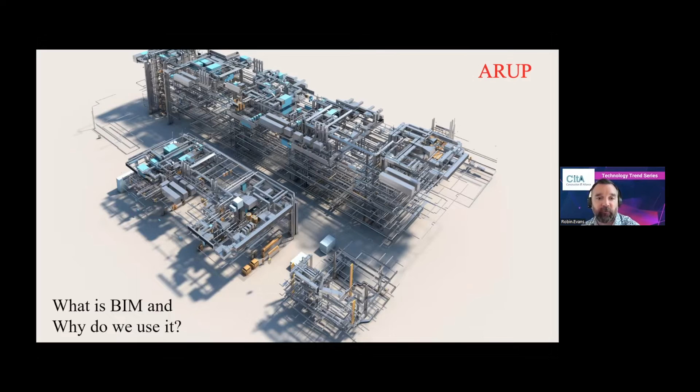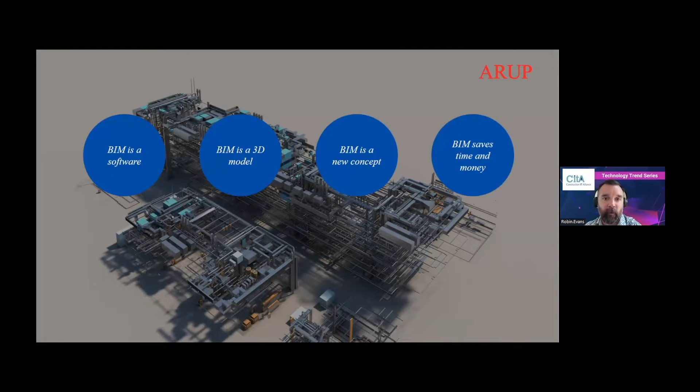So some common misconceptions. BIM is a software. BIM is a 3D model. BIM is a new concept. And BIM saves time and money. So the BIM facts. So BIM is actually a process. There's lots of people still talking about BIM and technicians exclusively, like in the CAD draftsman days.

Arup say that building information modeling is a descriptive term for technologically advanced, digital, collaborative, and information-centric processes in built environment design, construction, and operation. This means that all project stakeholders should be involved, which unfortunately is not always the case, and this can impact the overall potential benefits of BIM on the project.

So secondly, BIM is a 3D model. BIM uses 3D models as tools that form a part of the BIM process. These models can be used to store project information and display that information in a range of ways, including 2D drawings, schedules, 3D views, and so on.

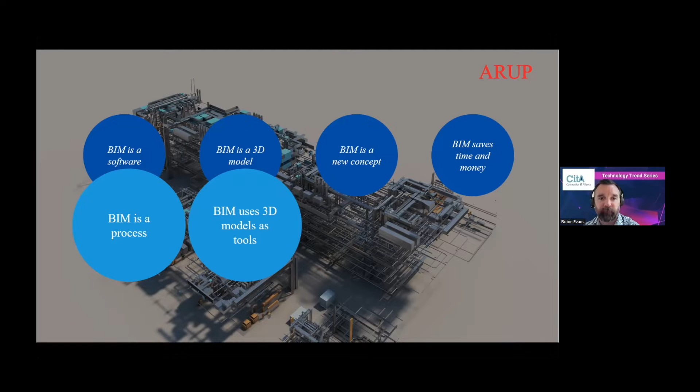BIM is a new concept. BIM has standardized existing, mature, and well-defined processes of project management. And the recently, 2018, published ISO 19650, as well as its predecessor, PAS 1192, has helped to progress this even further.

BIM saves time and money. I guess, just to be clear, BIM has the potential to achieve significant savings in terms of time and money, but this is only possible when the correct BIM process is followed and the BIM requirements are clearly defined and developed to suit the specific project and client needs. And conversely then, BIM also has the potential to add significant cost if this is not done.

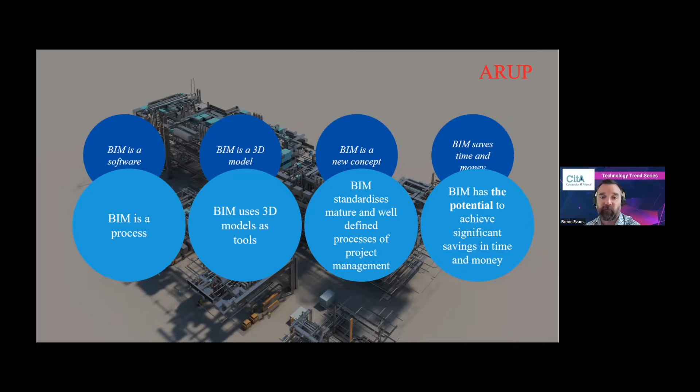So what are we meant to be getting out of BIM? Amongst a whole lot of other benefits, and in my case, mainly focused around MEP, some of the benefits we are meant to be getting are time savings, automation of design, better coordination, improved cost certainty, realistic visualizations, and really using the BIM model as the central database, which is of course what Revit actually is, for producing 2D and 3D drawings, schedules, equipment data sheets, visualizations, bills of quantities, and so on.

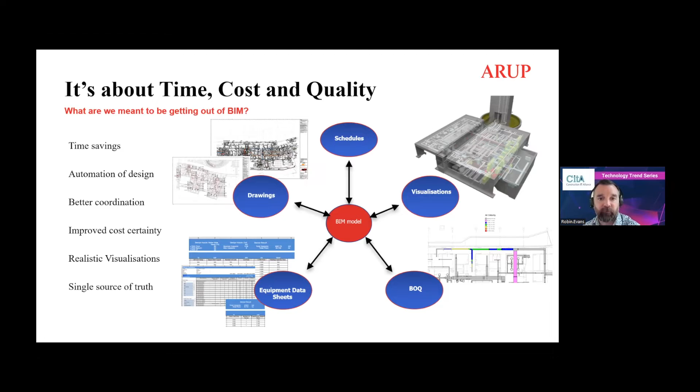But what are we actually often getting out of BIM is disconnected information coming from multiple sources, which may lead to inconsistency and risk of error. So although a lot of companies are embracing well-developed, efficient BIM workflows on many projects, there are still some projects which are not realizing the full benefits of BIM. And this can be caused by things like I'll go through on the next slide.

So I'll start with an issue that we see as quite a serious risk when delivering a BIM project. Basically, there's no such thing as one BIM. It can mean many different things for different people. And it's really important to agree at the outset of your project what it is supposed to mean in your case and on your project. We often hear people talking about level 2 BIM or BIM to ISO 19650 as if it defines the scope of the BIM model. It doesn't. It does do a great job of mapping out the process, but it doesn't set the requirements.

It can also be seen in what is sometimes referred to as academic or theoretical BIM versus practical BIM. And this is where we see an appointing party asking for all of the bells and whistles that BIM can possibly theoretically provide, like masses of parametric information or very high levels of graphical detail, without thinking enough about what they will actually use the model for or what the value of what they are asking for will give them. And also the issues that this could cause, like slow running models due to very large file sizes and so on.

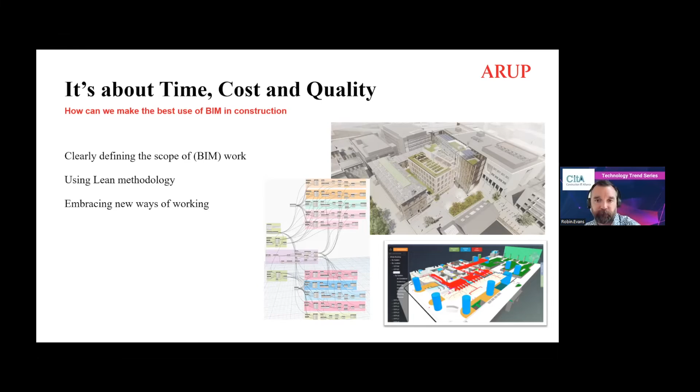So mapping our digital workflows is something that we've been developing in Arup over the past few years, and it's something which provides so much potential, especially when that same workflow is being followed globally. This has been successfully implemented, of course, in lots of industries to standardize processes, and it's a really great way to easily identify inefficiencies. ISO 19650 also has lots of small examples of workflow maps which help to describe a process in a visually easy to understand way.

Another really important consideration in making the best use of BIM is structured data. So using structured data on our projects is key for digital efficiencies. And this isn't just related to Dynamo scripts or Revit tools, but that's obviously really important. We're talking about digital information as a whole. For example, if we structure our Excel sheets in the same way using the same standardized template for all of our calculation sheets, we'll be able to harvest design information much easier in the future.

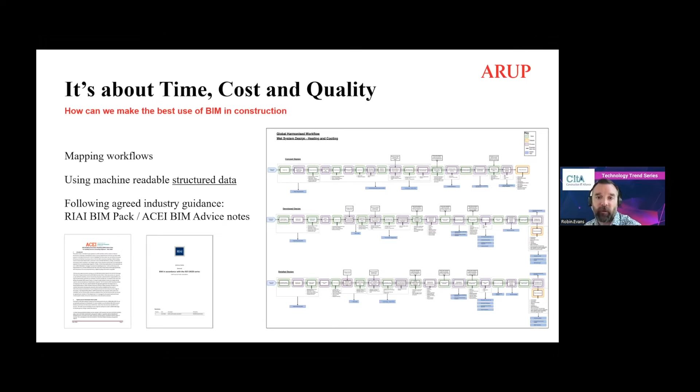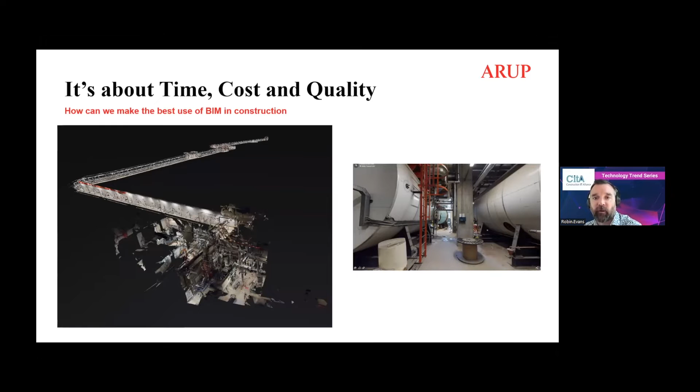And then we can produce really realistic photographic Matterport scans that we can view, something like this utility tunnel, and the little close-up there on the right, where we can see exactly where everything is and how things are constructed, even when we're off-site. So we can do virtual walkthroughs and so on, even when we're not there. And this is really useful, especially for hard to access areas. We've got a look at some really nice high level renders, which really help all of our stakeholders easily understand our designs.

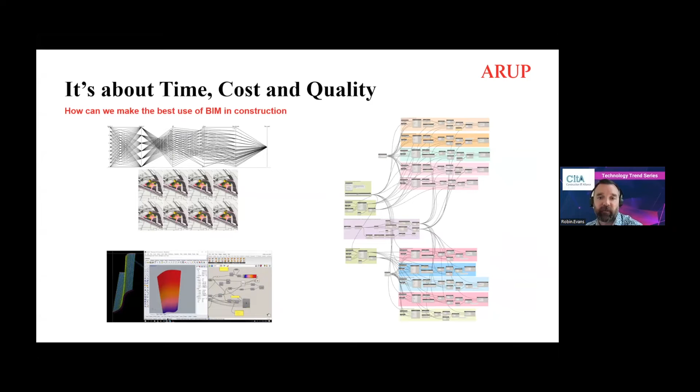And finally, then, if we do put all of our information into our models in a structured, machine readable way, we can leverage that for things like the parametric modeling examples on the left, which assess thousands of design options at the click of a button, or automating repetitive tasks by using Dynamo scripts like we see on the right.

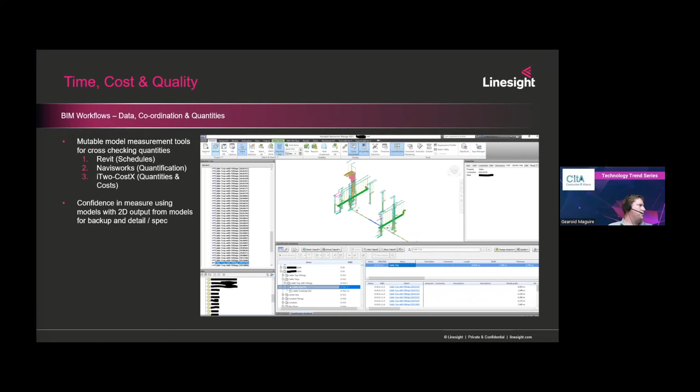So the first port of call in our workflows is to interrogate the model and make sure that the information that is in there is correct and is usable for us. In terms of a 4D element of it, we obviously are used to Navisworks, Synchro, Fusor, these types of tools that will allow us to create detailed schedules and construction sequences. So it's interesting for us to embed the time into the elements to allow us to take account of the time that is required. And from there, from a costing point of view, from a QS point of view, we can develop up from first principles the rates that we require based on the information that is in our 4D model.

The advantages of 4D BIM, obviously the 3D visualization of the construction process. You have much greater understanding of logistics of the project, so you can see deliveries and things like that. And then additional simulations can be performed with the model to perform a number of different scenarios. So solar shading and the like, and there are a number of different add-ons that you can allow to this software to enable you to see the various different scenarios and running through.

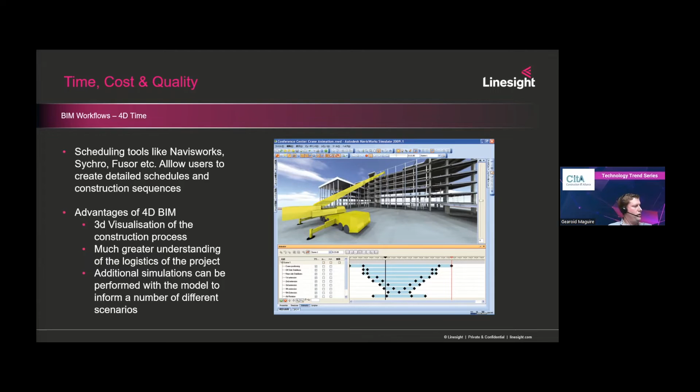In terms of the 5D costing, and I'll get to the worked examples in the videos in a second to show you how we capture the information, but it's driven from the 3D model data. You can extract in an automated process to provide quantities and rates for use in the cost estimates. But again, I can't stress enough that we need to, as QSs, be involved in the very early stages of the job in order for the information coming out to be in a proper format for us to work on.

So it should be faster takeoff. It should allow for better interrogation of the project estimate. And obviously that is of paramount importance in the current market at the moment, given the way costs are going and given the way lead-in times and such like are going. If you can take away the quantification process and streamline that a little bit, it will allow you more time to interrogate the model and get a better understanding of your project.

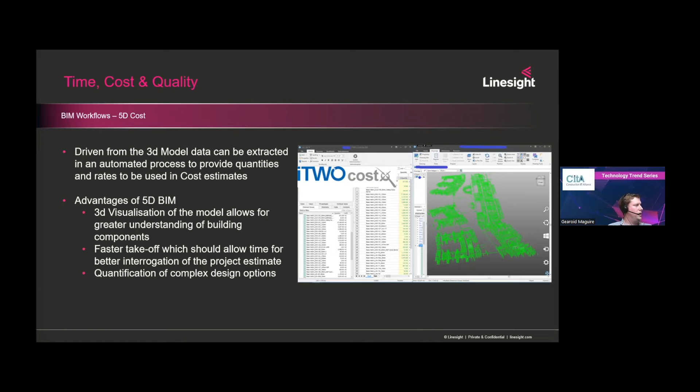And also the quantification of complex design options can't be misunderstood. As we push the boundaries of engineering more and more, very few straight lines being done anymore or flat surfaces. So it is good from a QS perspective that we have that ability to have the complex quantification. So I'm just going to show you a video. It's running in the background there, and I'm going to talk over it of how we create the model maps and how we get the information out in a quick fashion.

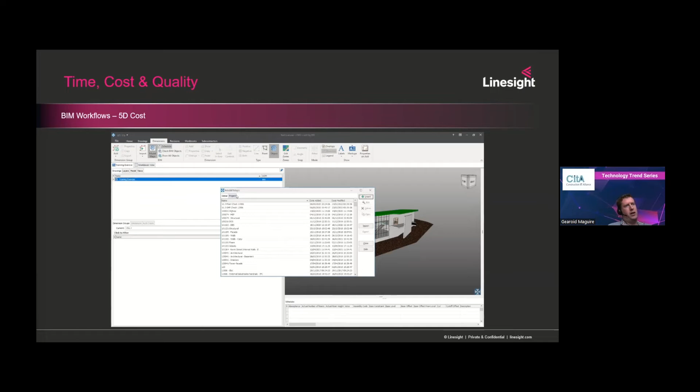So we're going through the various different elements of the build, and we can see it in isolation, and we can see it as part of a reference model or a ghost model against it. So we're now moving into the model maps, and you can pick on individual components of the model. You see it there in the element tree, doors, floors, and such like. So I'm going to look at the floors.

Traditionally, on a small job like this, it wouldn't take you that long to take off the volume of concrete on the floors. But if you had a number of different floors, imagine a 10-story building or something like that, it is a considerable amount of time to individually create the volumes for each floor.

So what I'm doing there is I'm creating a folder and dimension group structure. I'm running through all of the different systems, and I can give sub-levels based on that backslash there that allows me to subdivide it down into the various different levels. So level 3 in this instance would deal with the description of the concrete floor. If you had various different ones, it would split up the estimate into the various different sections.

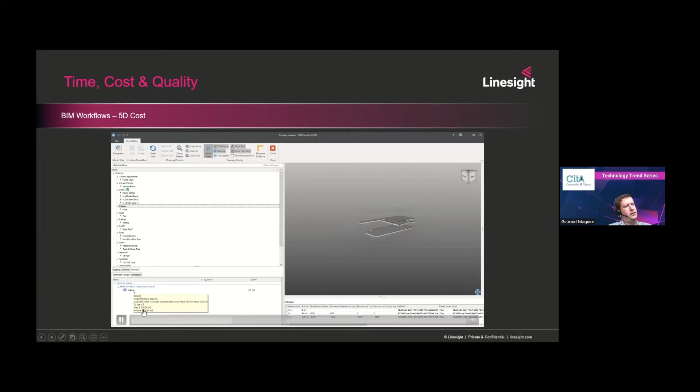So I'm just appending the area and the volume calculation that's in the columns there. And you can see almost instantaneously it has come up with the volume, but you also see the area of 210 square meters is attached to it as well.

If I look at the doors as well, we're going to get a count on the doors. You'll notice on the right-hand side there's a fire rating, which is in yellow. The reason for that is because it's user-defined properties. You've got a number of different classification or measurement systems that you need to adhere to, and they need to be classified in a certain way. If the information isn't in the model, you can apply that information, in terms of the fire rating in this case, and classify them as such.

The process involved is you can export the information that's in that tabulated format on the right-hand side into Excel. And then within Excel, you can create various different columns that allow you to put in whatever information you want, which in this case is the fire rating.

You also have the ability of creating custom quantities there, and you can look at the custom name. The painting of doors, if that's the quantity we wish, is obviously not included in the model, but we can use the data that's there, in this case height by width by 2, to give us the area of doors that are painted, and that can be calculated as part of the quantity as well. So what I'm trying to get across is not everything needs to be modeled or embedded within the model itself. We can actually take information out as well.

I purposely left that error in, because I wanted to showcase that it's not a situation where you press a button. You need to be able to manipulate the information that's coming out. If you see now, when I hover over it, the painting of doors is 13 million odd square meters. That's obviously incorrect. And the reason it's incorrect is, if you scroll over to the right-hand side again, you see the widths, the number there is 813.

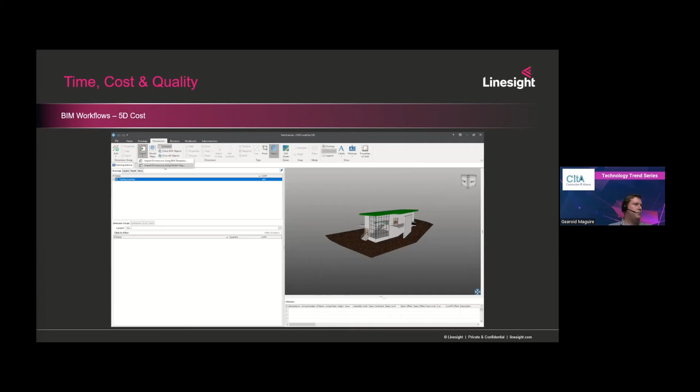Now that represents 813 millimeters, but in the program itself, the base unit of measurement for the project has been set in meters. So it represents that figure as 813 meters, and consequently the height of 2,134 as 2,134 meters. What I've just done there is I've changed the unit to represent it as millimeters. So the base unit of measurement remains meters, but millimeters is now the unit of the quantity derived from that column, so 2,134 is 2.13 meters. And then when we bring it in, it gives us the correct quantity and the correct dimensions to be used. So I'm just importing the dimensions from the model map.

I've just done 2 quick ones in terms of the volume and the count of the doors, so you can see how quick and easy it is to get the information in there. But, as I said, with a caveat: if we don't put in the proper time to interrogate and understand the model, the information that comes out is going to be wrong, and you're going to be in trouble with your estimates. So that's the model maps come in there, 67 cubic meters in the volume, and the door quants as well. You'll see the fire rating has been done individually, so you can split it out.

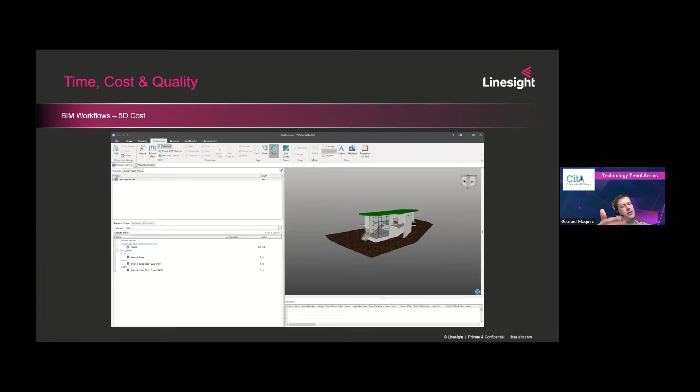I've had jobs in the past where we looked at phasing, where you can put phasing into the Revit model. So you want to have the various different phases split up into the cost estimate, and you can get that fairly quickly by just putting the subdivision of the folders.

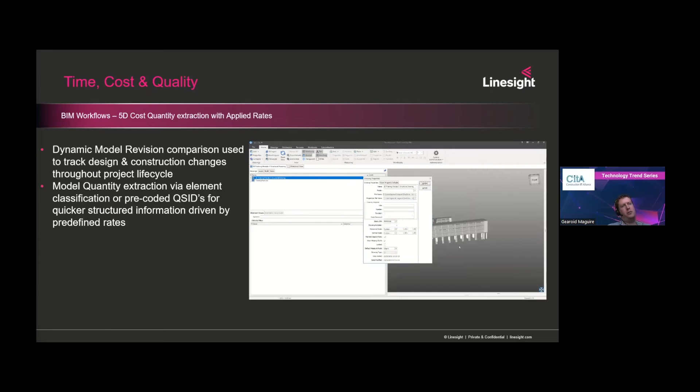The last video I want to show is the QSID. So the basis of this is a QSID, again, will allow you, through the use of user-defined properties, to append both a description of what the information is, be it a floor slab, a column, or whatever, and also apply a rate code to it as well. And that rate code can be sourced from an inbuilt rate database that you either create or you import from an external source through an XML import.

I'll just quickly run through in terms of the model maps that are being created. It'll flash through in a second. Okay, so it's important with the, if I click on this one here, you can see the folder has been occupied by the QSID and the dimension group has been occupied by the rate code.

The reason I do that is because when I go to create a workbook and I import in the model map information here, and show all items to make sure I can bring in all the information in the model map. So I'm just going to let this run through in terms of the model map. Okay, so that information is coming in and being imported.

So when I create the workbooks now, it is looking in the rate column for the rate code that I have appended to it. And then it will ask the software system to go and find that rate code within the default rate library that I have specified. And once it has done that, it will automatically populate the rate to whatever it is you have in your default rate library.

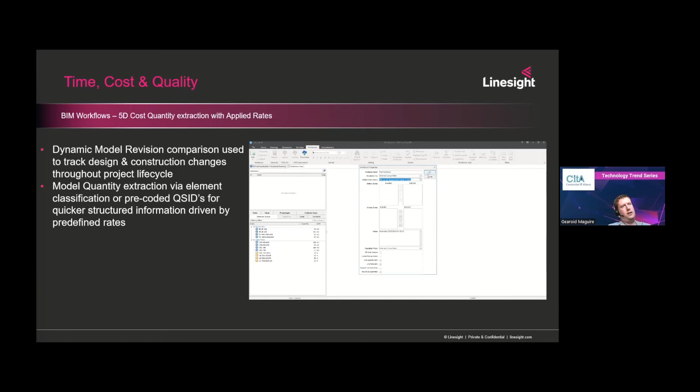And if I append on the default rate library, which is module 8, which is the CostX system, you can see we go OK on that, and it will automatically populate it, and it will automatically populate the rates onto it as well.

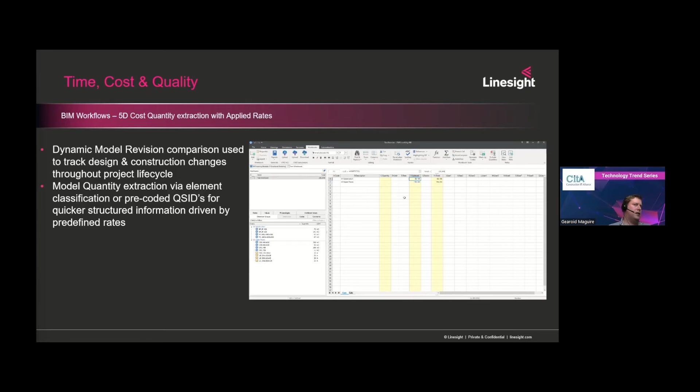So you can see the processes are, if you get them right and you get the information in there, the process can be a lot more streamlined and leave you a lot more time to look at your rates and look at your quantities and look at the various different elements that a QS can look at. So that's that video there. We move on to the next slide.

The last slide that I have on is quality. And I'm looking at quality needs to be embedded into the 3D design phase. Data quality initially needs to be put into the models at the very early stage, and any missing elements to be highlighted. And we need to maintain that quality throughout the project lifecycle or construction process through the use of, we've used field apps a lot, BIM 360 Field.

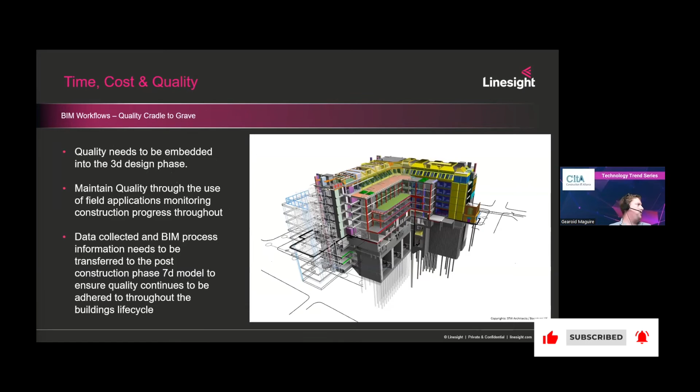Sorry to interrupt, Gearoid. Is that okay to wrap it up? Yeah, we're going one last one. That's okay, we'll finish up on that. That's perfect. Okay, thank you, Gearoid. And without further ado, Andrew, you've got the ball. Okay, I'll just share my screen. You see that? Yes. Okay, great.

So my name's Andrew Bellerby. I'm the Managing Director for Solibri's operations in the UK and Ireland, and I'm going to talk to you a little bit today about quality assets, quality data, it starts with you. And I think the previous two presentations.

Gearoid, sorry, would you mind just stop sharing your screen, please? Sorry, thanks. That's okay. Sorry, Andrew, thanks. Okay. So there we go. Yeah, that's fine.

Okay, so Solibri, probably the first company to bring quality control, quality assurance to the construction industry with regards to BIM digital models. And I think the previous two presentations have set this up quite nicely for me. Solibri actually started many years ago as a company that were providing quantity takeoff services and developed a program that did that directly from the IFC files in much the way that you've seen in the last presentation.

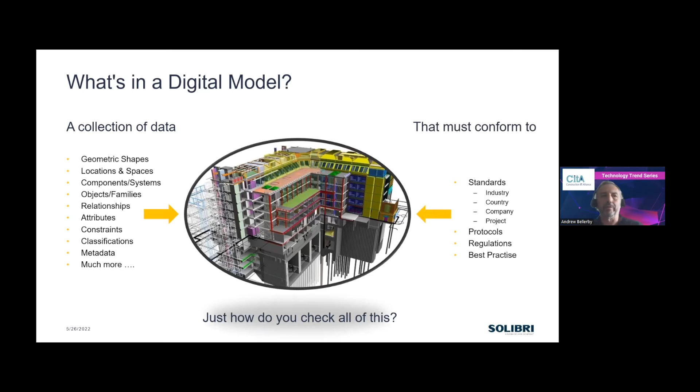So if we have a look at what's in a digital model, it's essentially a collection of data: geometric shapes, locations and spaces, components, objects, families, relationships, etc. That must conform to standards, protocols, regulations, building codes, best practice. There's a lot of information in the model. So how do you check all of that? It's pretty tough, especially as processes are changing. People have moved from 2D into 3D. The clear processes that were there before are not necessarily there now, and roles have changed as well, which all has an impact.

Andrew, sorry, this is Elenia. I was just letting you know that you actually have until 2:05 to speak, so no need to rush, okay?

Okay. So what do we mean by BIM quality assurance? It's certainly not just clash detection. Obviously, that's a key part. Call it clash detection, clash prevention, design coordination. It's a key part of BIM quality assurance, but there's much more to it than that. Data validation has been touched on in the previous two presentations. That's becoming hugely important as we go forward.

But how do you check items that don't physically clash? How do you check deficiencies in the model? So what's missing from the model? How do you check compliance with building codes? And actually we're working on some projects at the moment about automating building code checks and realizing just how difficult that is to do from an automation point of view, mainly because many of the codes are open to interpretation. The geometrical models don't often have the information that's required to deliver results. So it's been an interesting topic, but that's perhaps for another presentation at some stage.

What about fire safety? How do you check for fire safety? Carbon, is my design compliant? So there's lots of things that need to be taken into consideration when you think about quality assurance and quality control for your digital models. And we are really moving from data to making decisions. So you can only make decisions such as scheduling, cost information, facilities management, planning, all those sorts of things, if the data has been validated, if it has been checked.

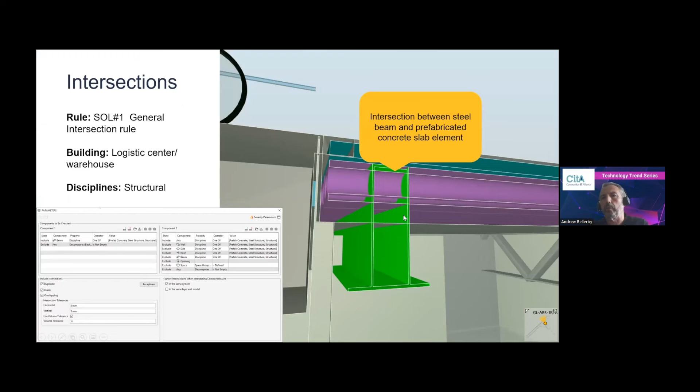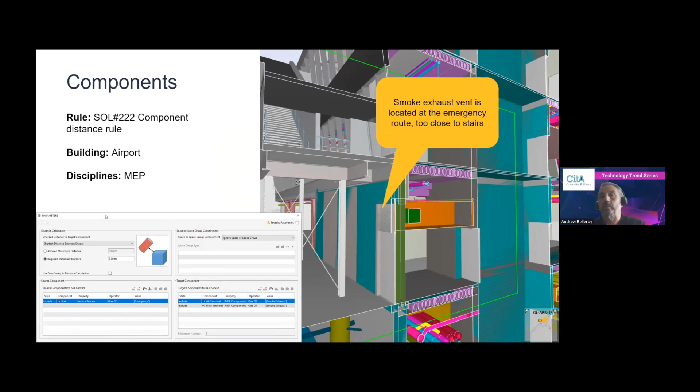So some of those things I mentioned, obviously clash detection, not the whole part of model checking, but still a key part of it. So yes, of course we do that. Most softwares do their own clash detections. But perhaps things that you don't see. So in this example, the smoke exhaust vent is located at the emergency route too close to the stairs. So it's not a physical clash, it's more a compliance issue there. The smoke vent is too close to the stairs, which isn't acceptable for a compliant design.

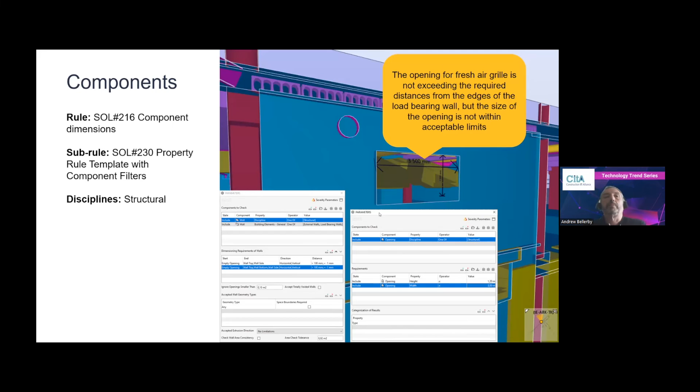Components, this one is actually checking the structural elements and do they actually conform design-wise. So the opening for the fresh air grill is not exceeding the required distances from the edges, but the opening is not within the acceptable limits. So there could be a structural issue there in terms of that type of item. Typically, you might pick these up later on in the process, but this is an automated way of doing the checks.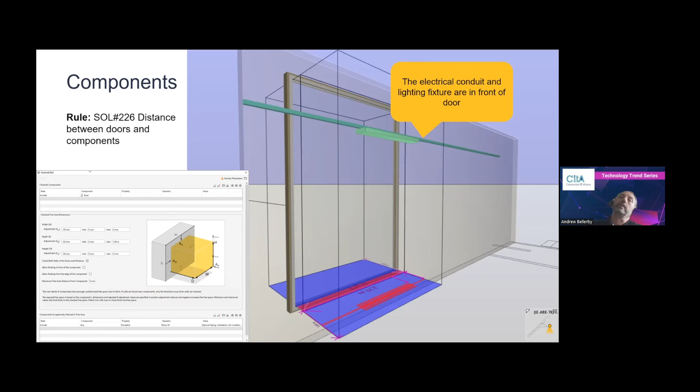When you're looking at things that don't particularly clash, so checking distances between doors and other components. So a common issue we see is people try to open the door, but there's something in the way. So in this case, the electrical conduit and the lighting fixture are in front of the door. It could be a suspended ceiling that we've seen in front of the door in different cases as well. So it's important that these type of issues can be checked.

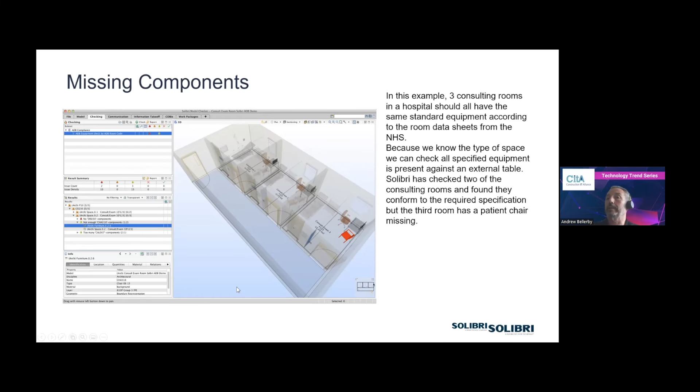Missing components. What happens if you want to actually check what's not in the model? So in this example, we have three rooms that should be identical. We've got data sheets for each room in a hospital, but in one of the rooms, there's a chair missing. Okay, it's just a chair rather than important equipment, but it allows us to check against different data sheets to really ensure that all the equipment is in each room if it's required. And that could obviously be applied to many different cases.

Perhaps other things that are more to do with the automated building code checks, accessibility. So in this example, a hospital, you can see there's actually quite a lot of rooms that have been highlighted because they don't conform to, in this case, requirements for turning a wheelchair around. So what we're doing here is we're projecting the toilet and the basin down to the floor. We're checking it against the diameter of the turning circle of a wheelchair. And then you can start to see, well, does it actually comply with the regulations? Is it a compliant design?

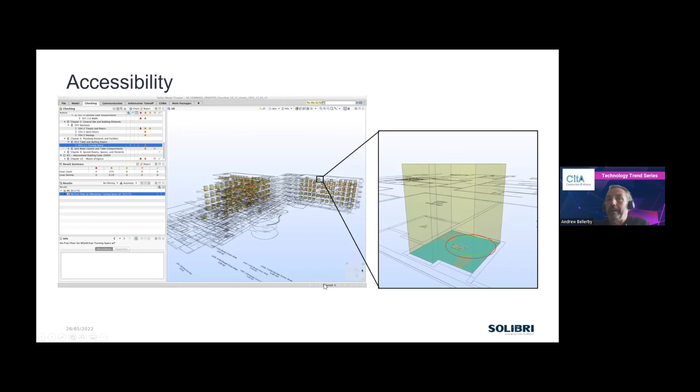And then what we're starting to look at more recently is things like fire safety and fire stopping, working with some of the large contractors and fire design companies in the UK. We're trying to automate the process of checking for builders' work holes and actually realizing that it's quite a complex issue when you actually come to solving these type of issues.

So some of the checks we're doing, the position of the holes in relation to each other, the positions of the holes in relation to the edge of the slab or the wall, the positions of the services within the builder's work holes, and that all gives you different challenges with different types of pipes, which require different tolerances. The type of flow through the pipes can affect it. There's all sorts of rules that go into what is actually a really complex issue.

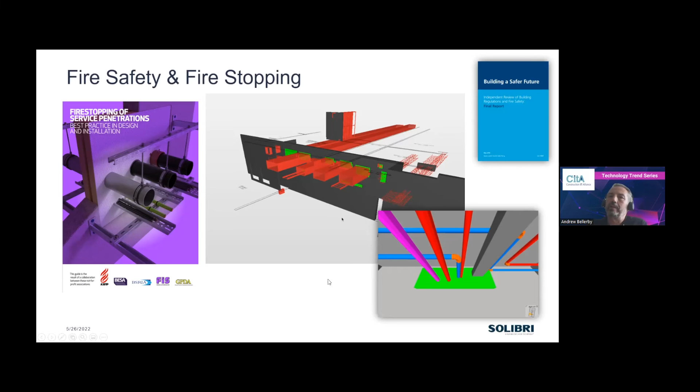So these type of problems are things that can be automated and are really difficult to check. It's a major issue for a lot of the contractors, a lot of the designers, the MEP companies that need to look at those sorts of things. But other rules that we use in the fire safety side of things, so compartmentation, in this case, the design isn't compliant, it's not enclosed.

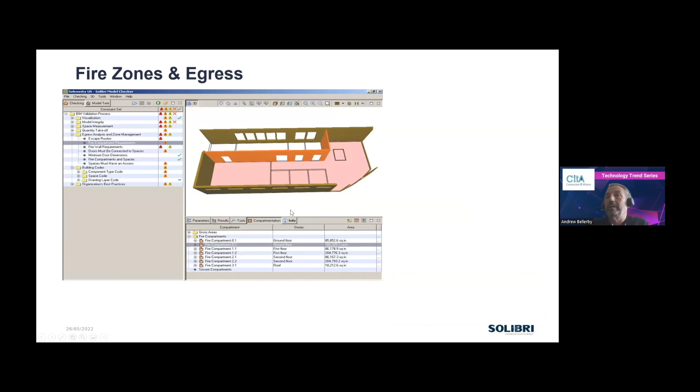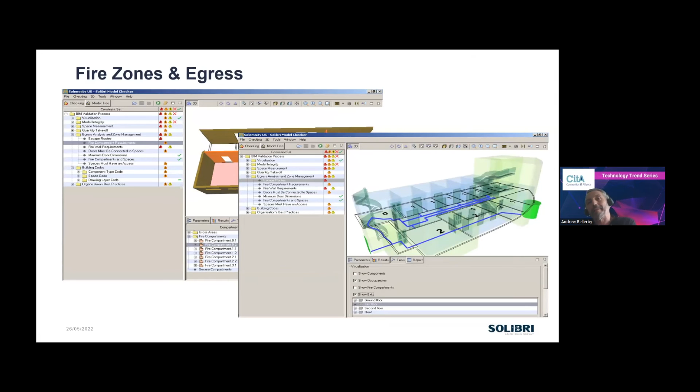We can look at egress in terms of the shortest route to the nearest fire exit. And then you could even go and say, well, if I can't get to the closest fire exit, then is there a window that's nearby? And if there is, then what's that drop down to the floor? There's all sorts of really complex things that you can write into the rules.

Sometimes we're asked, well, can we check things that aren't in the model or aren't even modeled at all? So a recent rule that we've created, a stud opening rule, checks for clearances for services above doors. The studs around the door frame aren't typically modeled. So what we do when we run the rule is we temporarily build these studs into the model, we do the check, and then the ghost studs are removed again from the model. So it's really a smart check for things that you perhaps wouldn't pick up in a manual check.

And then other things, door leading edge rule again is another new one. This one checks for clearances and interferences with door openings. The door openings, we know which way they're open because the information comes from the IFC file. And that's been developed as part of a digital compliance project that we're working on with a number of other educational establishments and interested parties as well for automating building code checks.

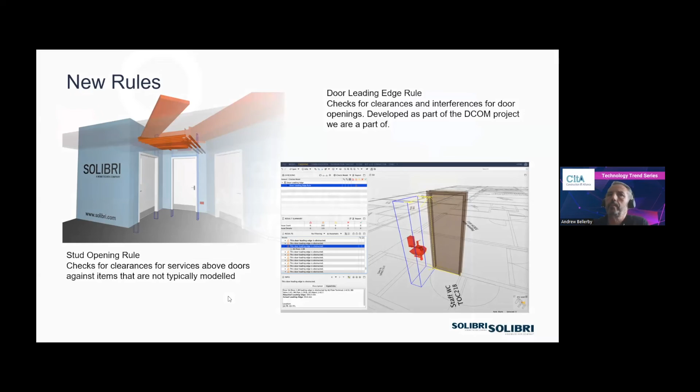So we've looked at design. Obviously, there's many stages throughout the construction process. So what about quality assurance in manufacturing? Well, we have a few nice examples of that. And I guess we didn't really anticipate that Solibri would be used in this way, but our customers always surprise us in terms of how they use the software.

And Laing O'Rourke's an example of that, where they've actually taken Solibri, some of the rules that are there in Solibri as standard, and been able to check, can these precast concrete parts go to the carousels, the automated machinery? Are the dimensions correct to fit the machines? And that allows them then to guarantee that their manufacturing process is correct.

You can imagine with precast concrete parts, if it's wrong, it gets to site, then another part has to be cast and delivered to site, and that can take a couple of days to get there. So ensuring it's correct before you go to manufacturing is also a key part of the process.

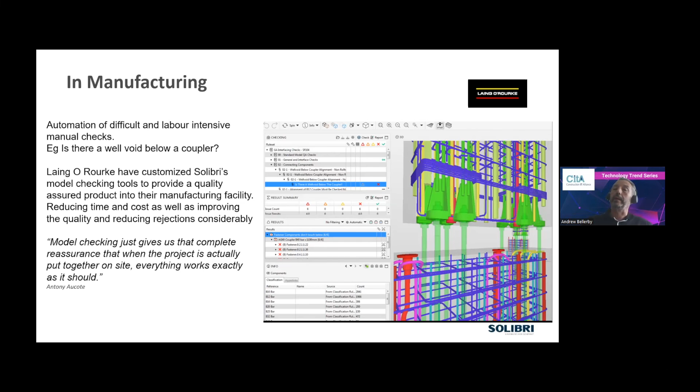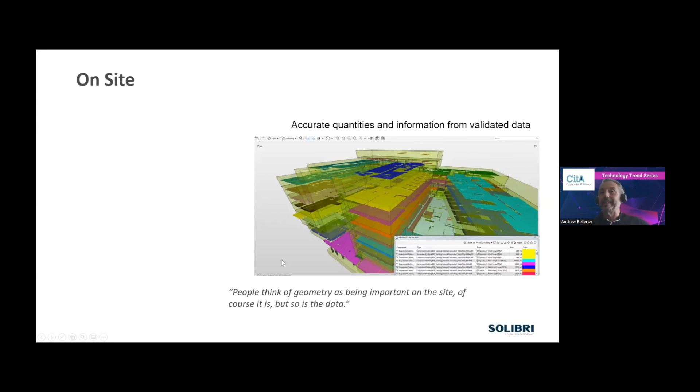And then you move through into the construction phase. So what we're looking at here is, it's been touched on, getting accurate quantities and information from the models already. You can only generate that if you've validated the data in the model. So it's key that you can get that information from the model, but it's also key it's been checked, it's been validated.

So one of the most common issues we see is multiple instances of the same item in the model. And we've seen as many as 25, 26 columns in the same place because somebody's tried to copy it and they've actually copied it on top of each other. Not easily picked up by clash detection software, but that can affect your quantities hugely. So it's a key part, making sure the model is correct, the data within the model is validated, and then, as has been touched on already, it can be used further down the chain.

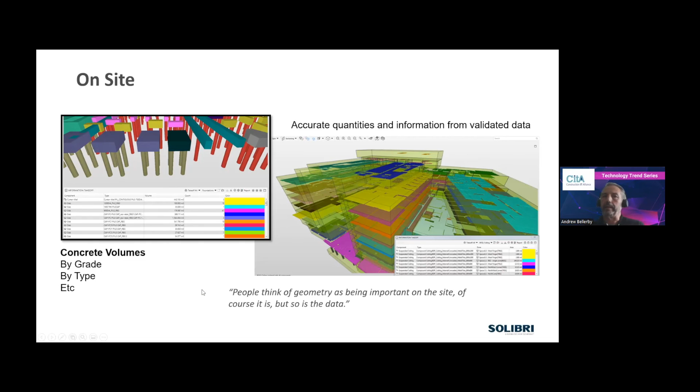Another thing I wanted to touch on is on construction site, does the as-built match the design? So Nemetschek have recently invested in a startup called Imerso, who have developed quite a nice, simple tool, cloud-based, that you upload your digital model, you upload a scan that you've done for the building, and it will then do a comparison of the as-built versus the design. So it's looking for tolerance checks.

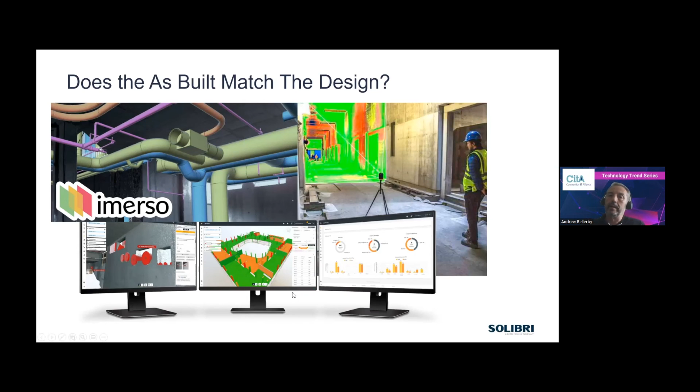You can see on this image on the left that the services aren't passing correctly through the builder's work openings, as we talked about with the fire stopping before. It will check for deviations in walls and slabs, and it will report that back to you. But quite nicely on from that is the ability to then actually pass the information in two directions. You can create a BCF, a BIM collaboration format, quite a common way of exchanging issues now between checking tools and authoring tools. So it can be pushed to the authoring tool for resolution that way, but they can also update the BIM using an updated IFC file.

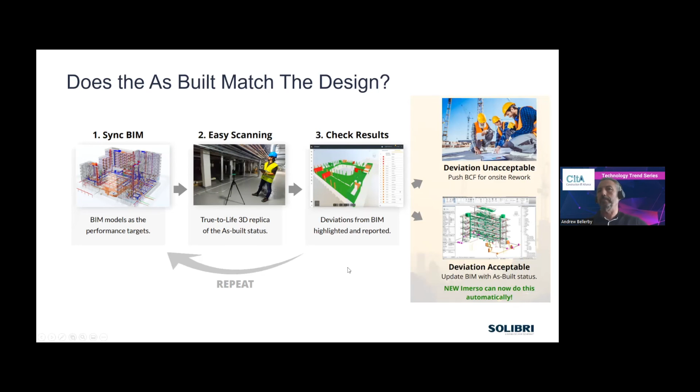So pass that information back again to the authoring tools, or quite a nice workflow that we see is passing it back to Solibri. You can recheck knowing where the as-built is, and do you still conform to those checks that you've done in the design stages? Is it acceptable, or does it need addressing? So you can now get quality on site as well.

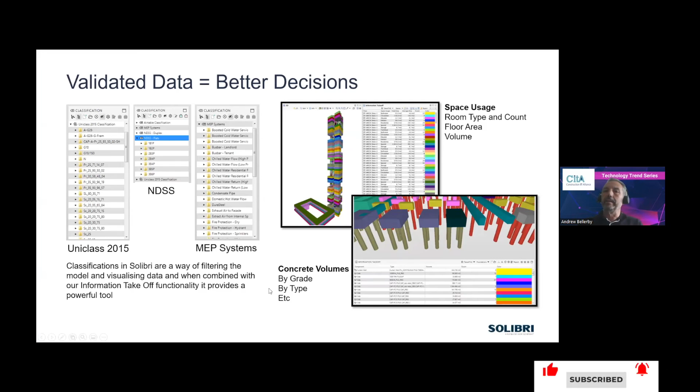Quality assurance in handover. Validated data equals better decisions. I think that's become clear. So there's been a lot of talk about classifications on the previous presentation, so I'm not going to talk too much about them, but it's just different ways of breaking the model down, whether it's by element, by system, by Uniclass, by phase, building, whatever you want it to be, and then using the data from that. But again, as we've said before, when you go into things like COBie, you need to ensure that information is correct.

I was talking with a customer of ours, it was actually a couple of years ago now, and he'd been asked to audit a COBie submission that had been provided for a final handover. And when he did the checks on what was supposed to be completed and issued information, he found more than 2,000 errors in the file, just because the data had not been validated, it had not been checked. So how do you rely on that data for making decisions? You can't, you're guessing.

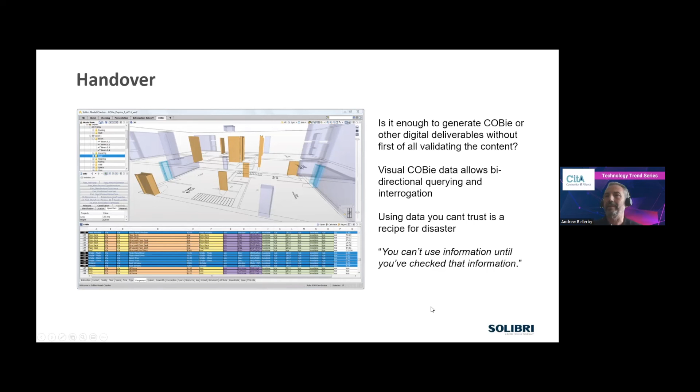So we said at the beginning, quality data, it starts with you. When we're talking to a lot of people in the industry, various things come forward. What's the driving force? What compels you to make that change and introduce different ways of working, whether it's implementing BIM or something else? Some people, when you talk about quality assurance for BIM, say we do check our models, we do design coordination. That's only a small part of it, as you've seen today.

Clash detection tools have been around for a long time. We still get far too many issues on site that come from issues within the models. "It's not our job," or "we'll do it when we're told we have to do it." It's something that we hear all the time. We saw with the government mandates that forced people to use BIM and to start delivering COBie, for example. Unless people are told they actually have to do something, they tend to do, I won't say as little as they can, but there's excuses there for not providing a quality product at times. But pride in your work and company reputation should be a prerequisite.

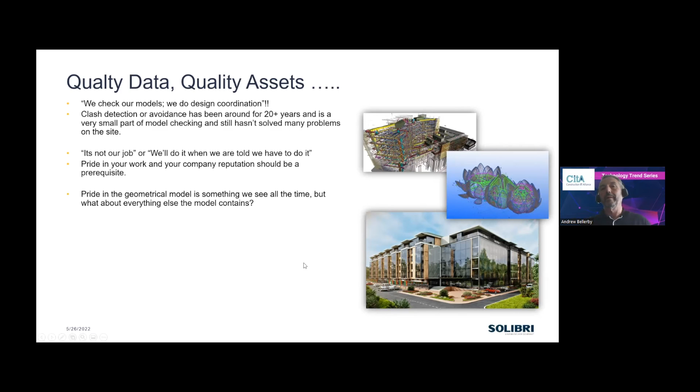We see a lot of people who don't like it when you criticize their model. The model looks fantastic. We rarely see a model that we can't find something wrong with. In fact, we've never seen one. With the amount of data within a model, it's impossible to check everything. And what we're trying to do is automate those processes. There's always a multitude of errors there. Okay, well, I'll jump to the next one.